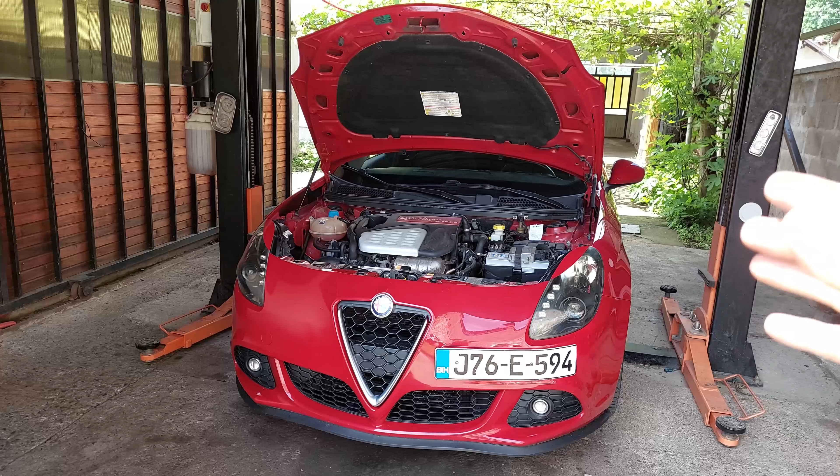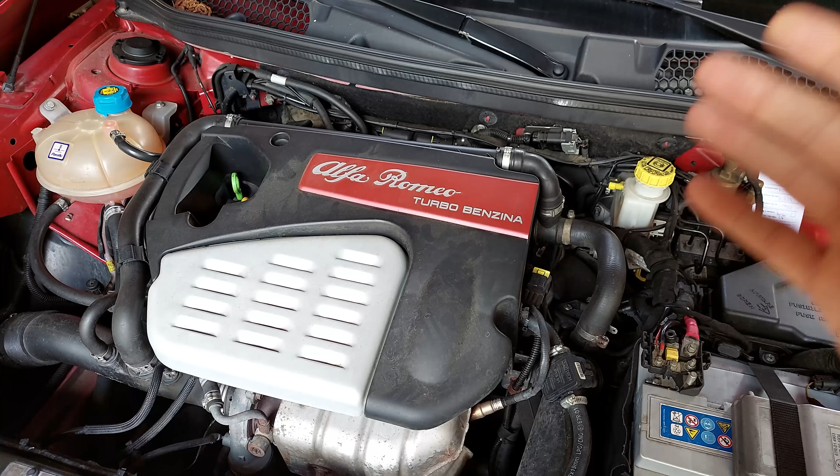Today we're gonna be getting rid of the vibrations on Alfa Romeo Giulietta due to bad engine mounts. Now, since the engine mounts are not gone all the way, the main symptoms are gonna include the shaking of the side mirrors and the vibrations inside the cabin. But besides the mentioned ones, you could also experience excessive movement on the engine on startup and when you are turning it off, also when you are going into reverse and when you are moving from first gear. A less common one is the vibration on the wheels, which you can also feel on the steering wheel due to the vibration of the drive shafts.

Alright, I don't know how well can you see it, but the rear view mirror is shaking. You can see it better on this bottle of water, and there are definitely strong vibrations inside the cabin.

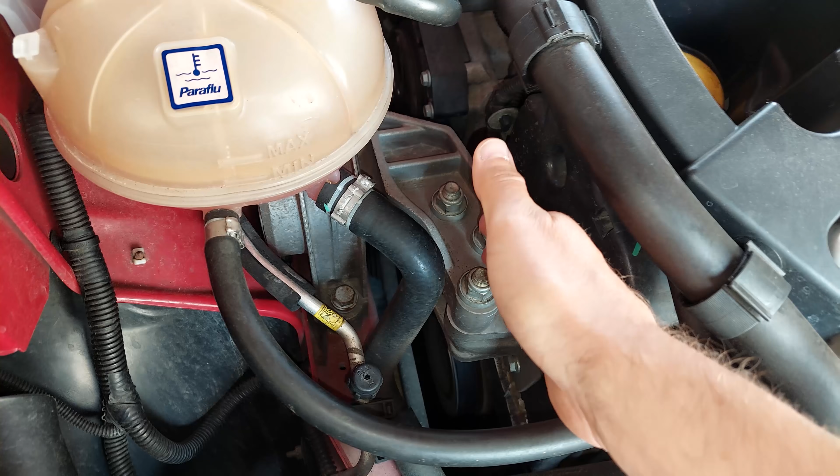Now, the failure of these engine mounts is quite common and they are kind of difficult to inspect because you can't really visually see what's going on with the rubber inside. However, if you put your hand on this side of the engine mount here, and if you feel any kind of vibration, that is a clear indication that you got a bad engine mount. Now, even the small vibration here is gonna amplify when it reaches the rest of the car.

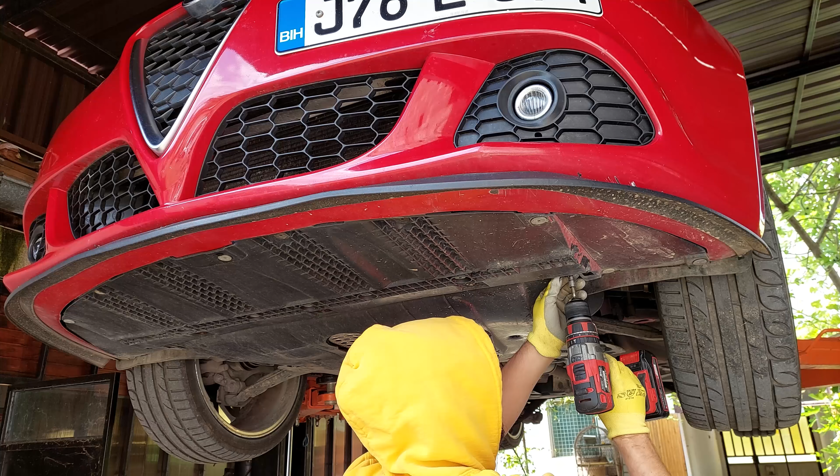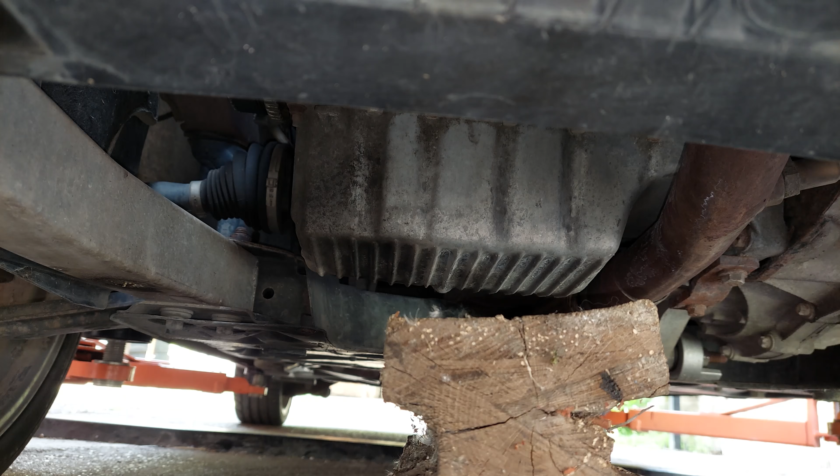I'm gonna start by removing the under tray. Now, instead of getting the jack under the engine, we are actually going to put a block of wood and we're going to lower the engine onto it.

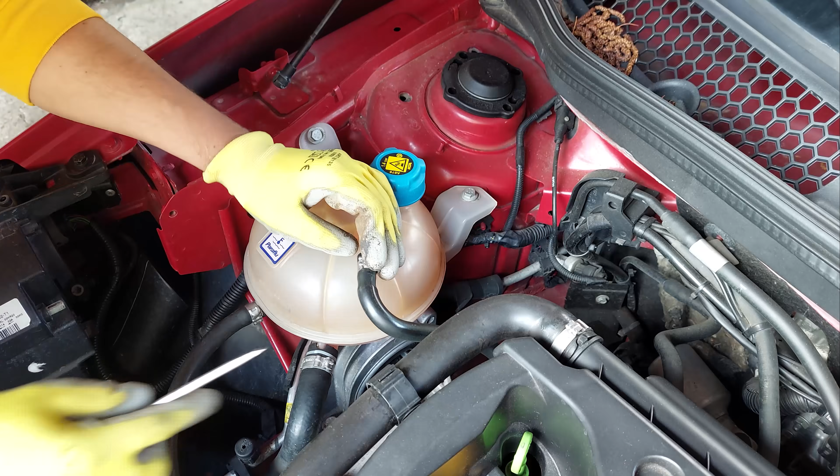Next, I'm going to remove this metal clamp here using a small flathead screwdriver. Now you want to be extra careful not to break this little plastic piece. I'm just going to slide it right here. Next, I'm going to remove these two 10mm screws.

And now I'm going to pull the coolant bottle up, and now you can see that we got access to pretty much all of the screws. I'm gonna start by loosening these three here.

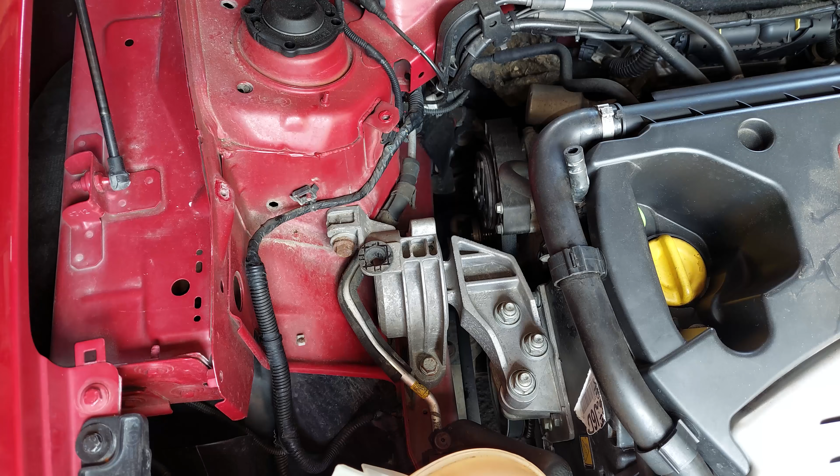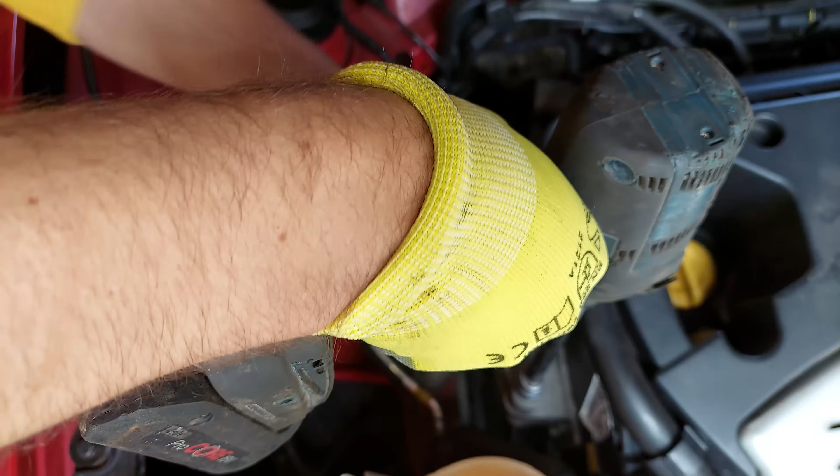Now you could have seen how the engine dropped a little bit. Just make sure that it doesn't drop too much. If it does, you're gonna have to adjust the wood under the engine a bit better.

Now I'm gonna use my 15mm socket to undo this one here and these two on each side. Now I can just pull the engine mount off.

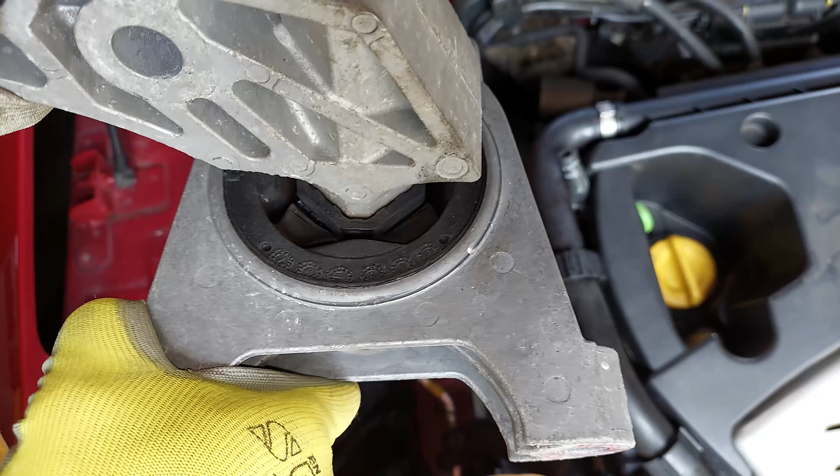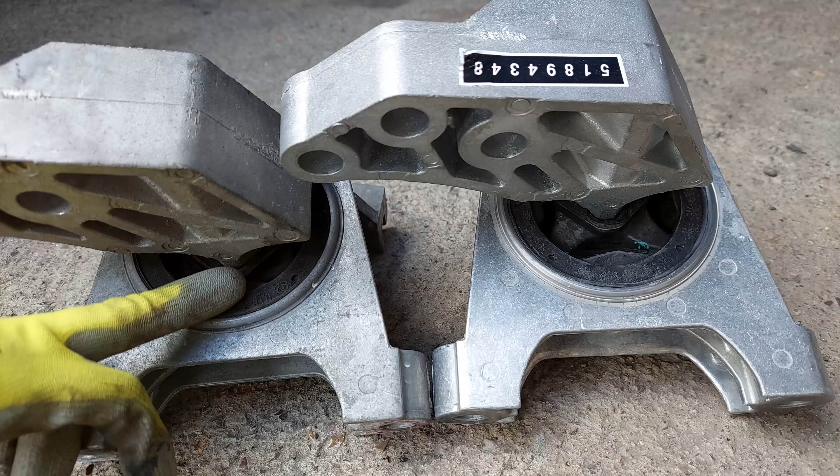Now you can see under it how this rubber is actually cracked on both sides right there. Now here's how you can see it the best, how bad this engine mount is. You can see how this main part, how much lower it is compared to the new one.

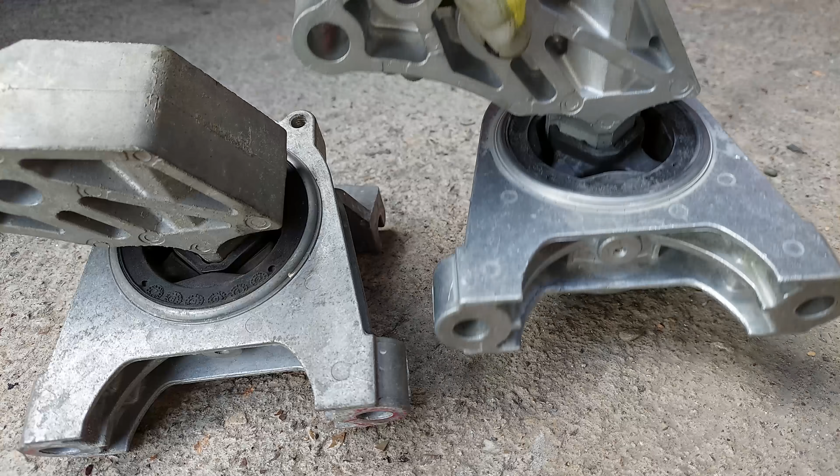We're actually gonna measure it. So here we got 28mm. Let's see how much we got here. Here we got 36 millimeters. So this old engine mount dropped by some 8 millimeters down.

Now, while the engine mount is not in catastrophic condition, this rubber got squished down, and that is essentially what causes that vibration. I'm gonna clean all of the dirt here, make sure that you don't drop any in your belt.

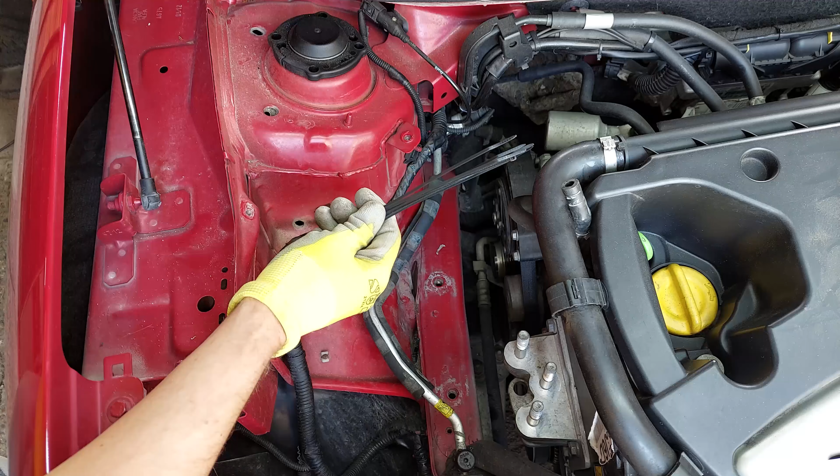Now, instead of putting this tape to protect the AC pipe, I'm just gonna add a couple of these small zip ties. I'm gonna make sure that this square part faces down.

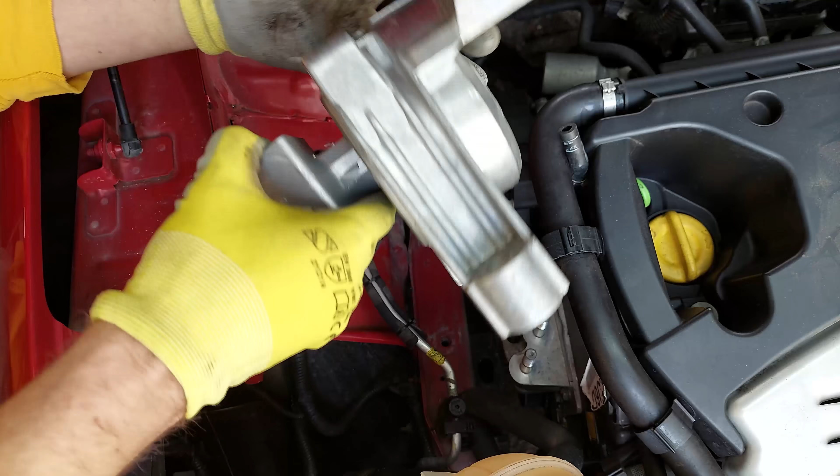Alright, time to put the new mount in. Now, if you need to move the engine a little bit, you just use a pry bar. Now I'm gonna tighten each one incrementally to spread the pressure.

I'm just going to put a little bit of thread glue on these screws.

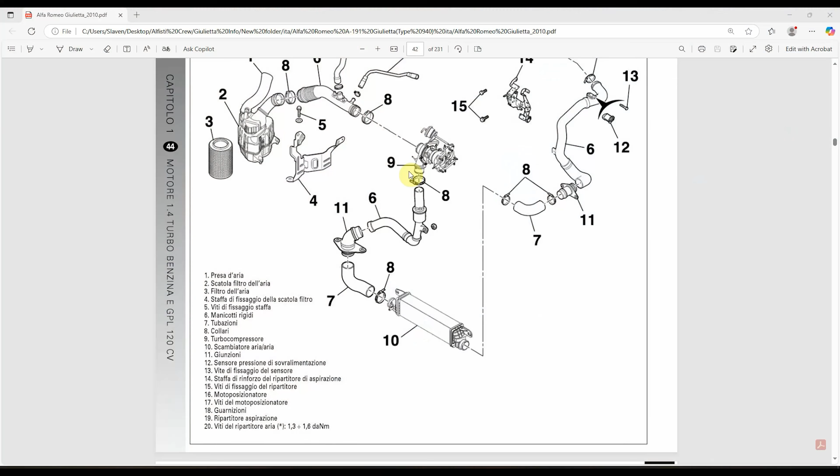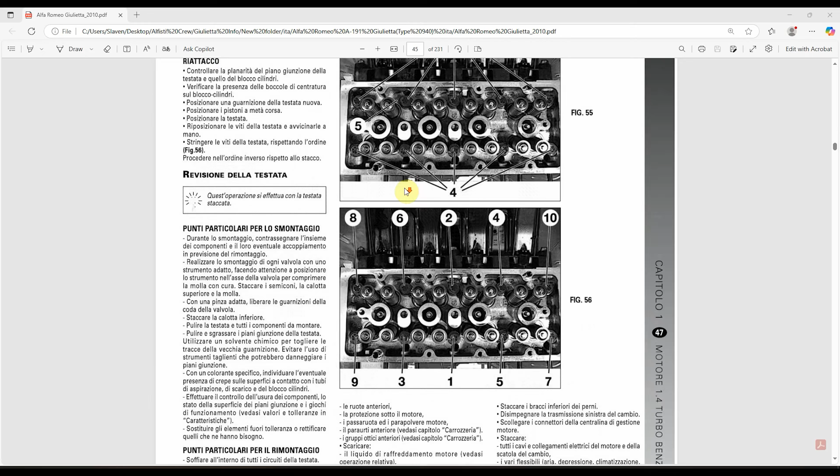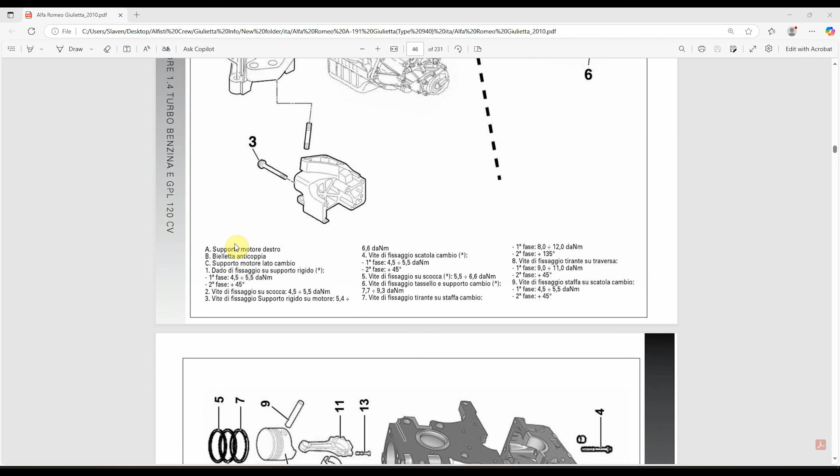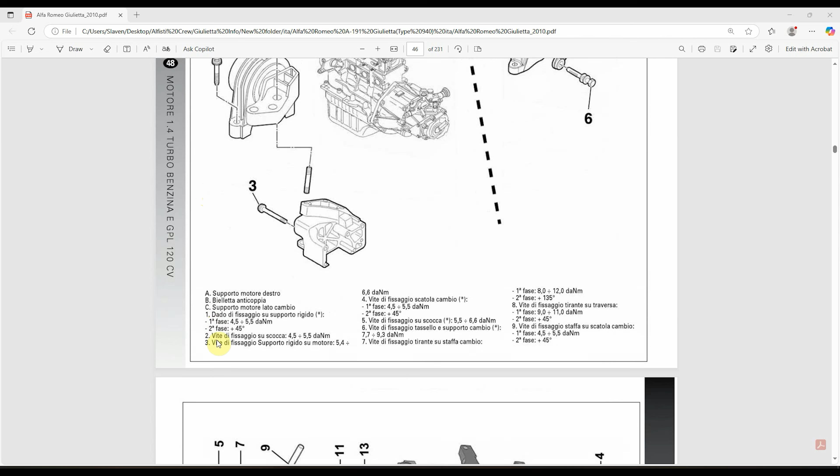So here are our engine mounts. I'm also going to be replacing this bottom one, as you'll see in a couple of minutes. Here's our nut number 1: 45 to 55 newton meters, and the second phase is an additional 45 degrees. Now on screw number 2, we've got 45 to 55 newton meters, but honestly I do like to tighten them up a bit more.

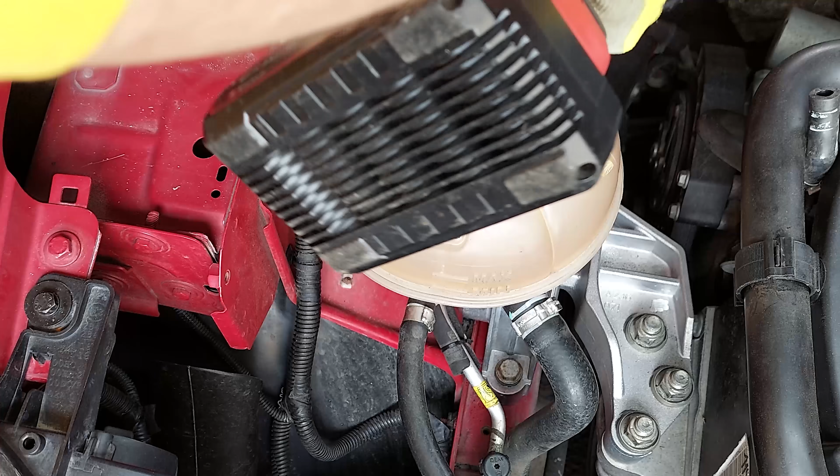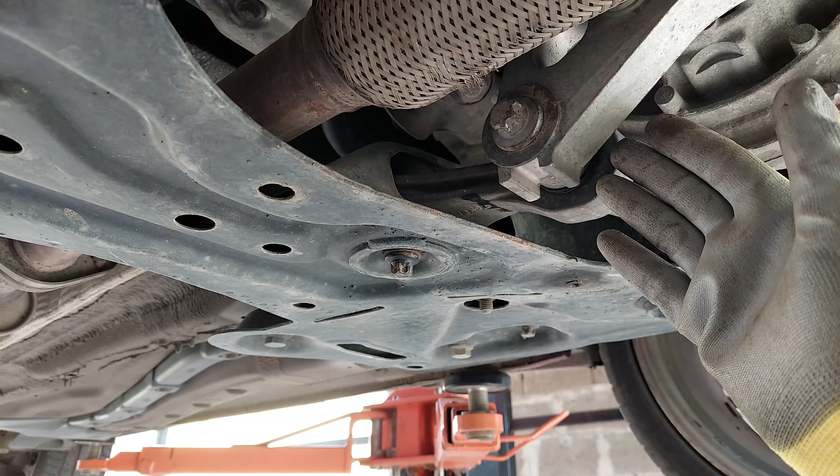Next, I'm going to be replacing this engine mount right here. As with the previous one, it's pretty much impossible to see its condition before you remove it, and that's exactly what I did a couple of days ago. I removed it and checked the condition of the rubber, and it was in pretty poor state. I also checked the one above the gearbox, and that one is luckily okay.

Alright, the first thing I've got to do is remove the exhaust out of the way so I can undo this main screw, and to do that I'm just going to use my pry bar. I'm going to pull the exhaust up a little bit and place this block of wood beneath it, which gives us enough clearance to undo this screw. This is going to be our E20 bolt.

First I'm going to get it loose. Now there's one more nut on the back side, which is size 21, so I have to keep it in place to undo this one. There's one thing you've got to pay attention to: there's this big washer, or whatever you want to call it, between these two parts, so make sure you keep an eye on it.

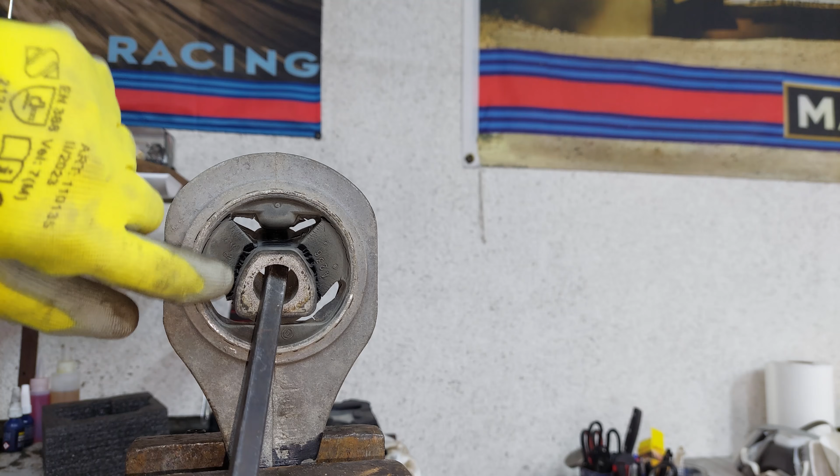Now I can just slide the engine mount out. Now you can see how bad this is. While this hasn't gone 100%, it's very close to it. You can see all of these cracks, which means this engine mount is definitely due for replacement.

Alright, here's our new engine mount. I'm just going to slide it in.

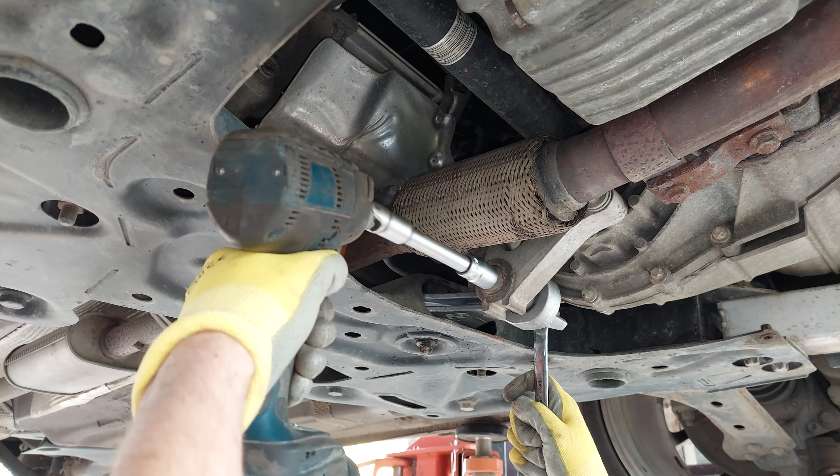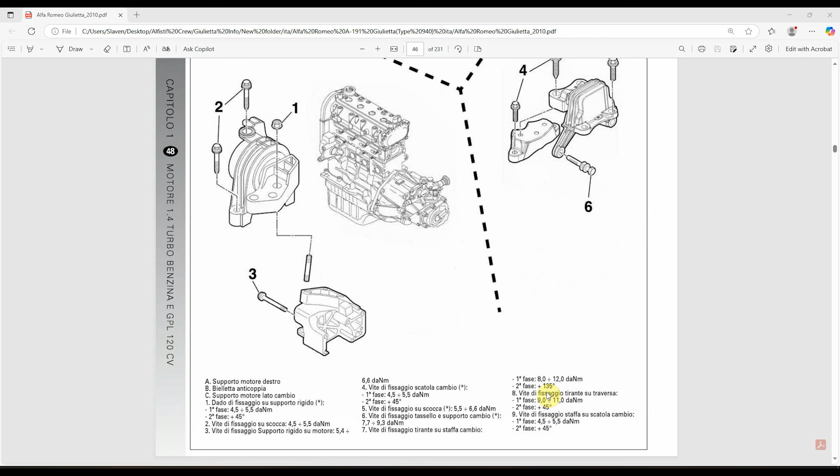So again, we've got to check our torque specs for screws number 7 and 8. For number 7, we tighten it from 80 to 120 newton meters with a second phase of an additional 135 degrees. Screw number 8 has to be tightened from 90 to 110 newton meters with an additional 45 degrees.

Alright, now to share the final results with you, I've got to admit this is now a completely different car. There are no vibrations inside the cabin whatsoever. Let me show you on the water bottle - you can see that the car is on. This is how much the water bottle shook before, and now you can see the water is not moving at all. It moves a little bit as I'm shaking the car, but that's pretty much it. I've got to admit I'm more than happy with the result.